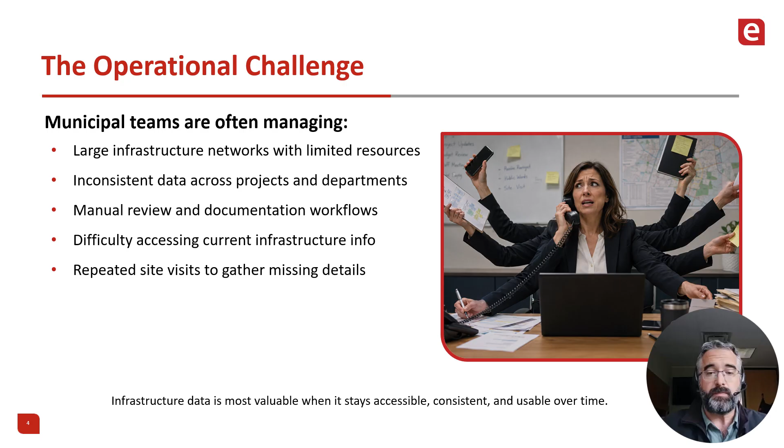And yet, despite all of that, municipalities today are under increasing pressure to maintain aging infrastructure while balancing those limited budgets, that limited staff, and growing service expectations in growing communities. At the same time, teams are being asked to make more informed and defensible infrastructure decisions using data that's often incomplete, outdated, or difficult to access consistently. Whether it's roads, sidewalks, bridges, or utilities, having reliable visibility into asset condition is becoming increasingly important for planning, prioritization, and long term asset management. A big part of that challenge is making sure infrastructure decisions are supported by accurate and accessible information.

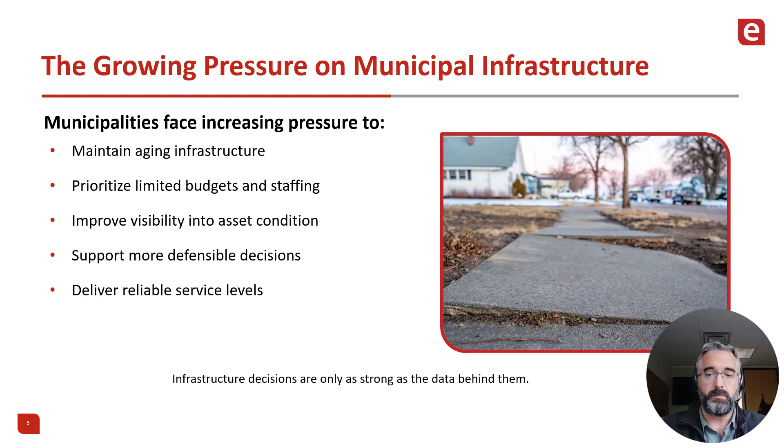Many municipalities are still relying on infrastructure information that has been collected over long periods of time across different projects, different departments, different consultants, and different systems. As a result, records can become incomplete, inconsistent, lost, difficult to maintain, or disconnected from current conditions in the field. In many cases, information is collected for a specific project, used once, and then becomes difficult to access or reuse later. That creates challenges for engineering review, asset management, planning, and long term infrastructure decision making. One of the biggest opportunities today is creating infrastructure records that are easier to update, share, and reuse across the organization that are harmonized with each other.

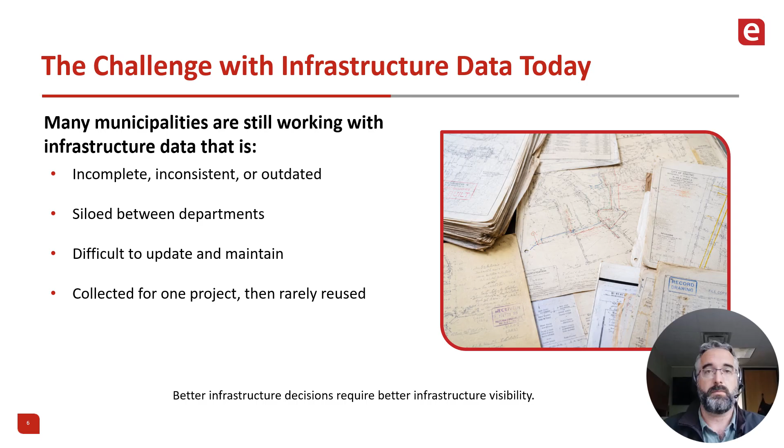And that naturally brings us to the traditional methods of doing this kind of data collection. So, traditional infrastructure data collection methods have supported municipalities for years, but many of those workflows can become difficult to scale as infrastructure networks grow and service expectations increase. A lot of condition assessments and documentation work still depends heavily on manual field review and human interpretation, which can make data collection time consuming and inconsistent between projects or teams.

Coverage can also be limited because collecting detailed information across large roadway or infrastructure networks often requires significant field time and repeated mobilizations. There are also safety considerations, whether crews are working near traffic, active roadways, or difficult environments. Coordination can become troublesome as crews are rotated or take time off, and regional nuance or unique areas and objects can add further confusion and time. Some reasons why municipalities are exploring newer collection technologies are to improve consistency, efficiency, coverage, and long term usability of the infrastructure data.

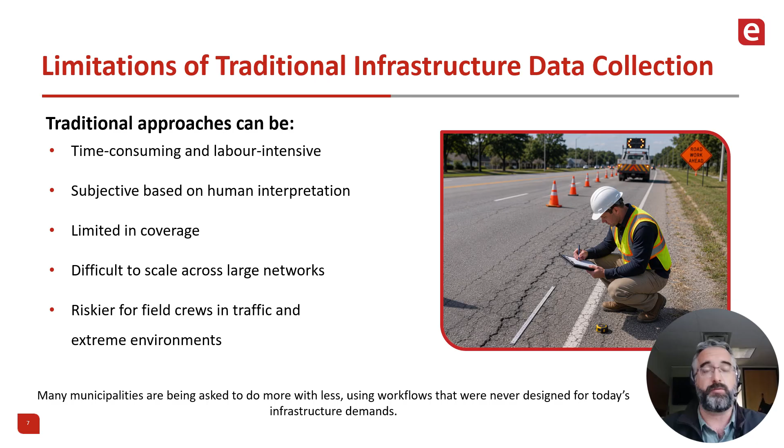So, as you might imagine, with the evolution of the technology and the history, municipalities are beginning to shift away from collecting infrastructure data only for individual projects and towards creating reusable digital infrastructure records. The focus is becoming less about isolated inspections and more about building complete, accessible data sets that can support planning, engineering, GIS, asset management, and future projects over time. There's also growing interest in workflows that improve safety, reduce repeat site visits, and provide better accessibility and visibility across large infrastructure networks.

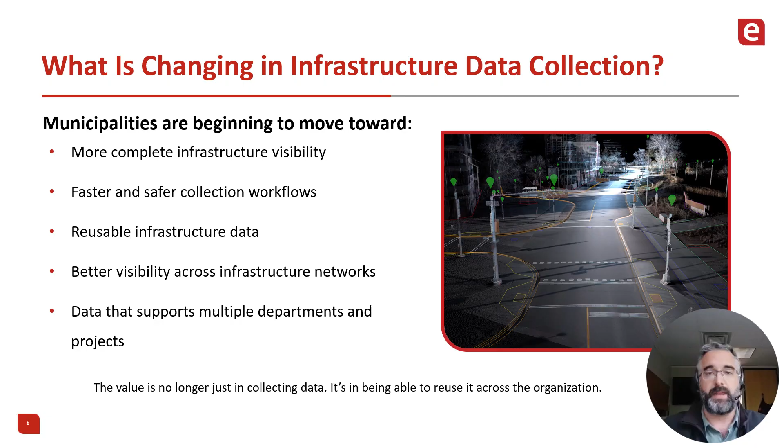A major change happening today is that infrastructure data is becoming something organizations expect to share and reuse across departments instead of recreating from scratch every time a new project starts. That shift is what's driving increased interest in technologies like LiDAR and reality capture. And so that brings me to my buzzword, reality capture. It really is an umbrella term for technologies that collect accurate digital information about real world infrastructure and environments.

There isn't just one way to do it. Different collection methods are used depending on the project, environment, and level of detail that are required. That can include vehicle-based mobile mapping for large roadway networks, drones for aerial collection, static or stay still LiDAR scanning for detailed infrastructure documentation, and portable systems for sidewalks, interiors, or hard to access areas. The common goal across all of these workflows is creating accurate, reusable digital infrastructure records that can support engineering, GIS, planning, asset management, and those future projects. The next step is understanding one of those core technologies behind many of these workflows, and that would be LiDAR.

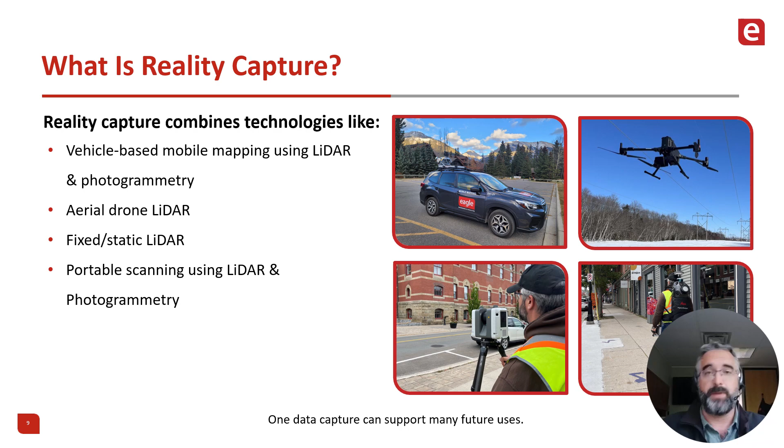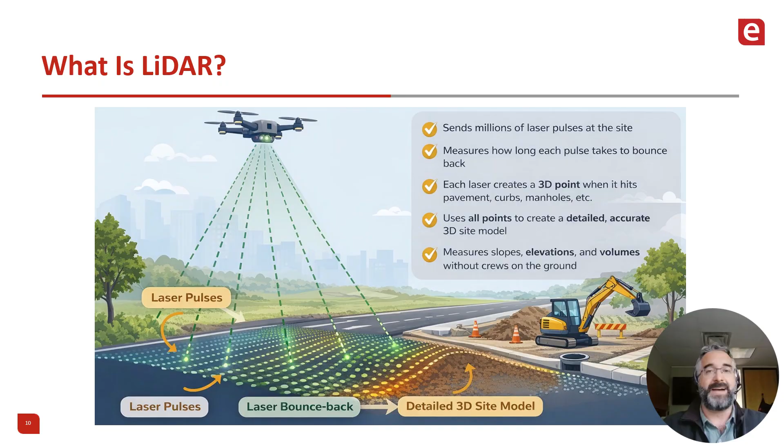At a high level, LiDAR works by sending out millions of laser pulses and measuring how long they take to bounce back after hitting surfaces like pavement, curbs, signs, bridges, and other infrastructure features. Each return creates a precise 3D point in space. When millions of those points are combined together, they create a detailed digital representation of the roadway and the surrounding environments. For municipalities, the value is not just the visualization, it's the ability to create accurate, repeatable infrastructure records that can support engineering review, condition assessments, GIS integration, asset management, and long term planning from a single collection workflow.

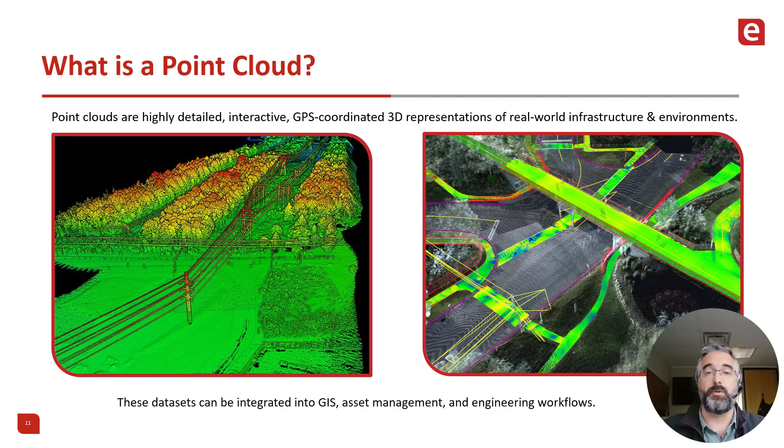These data sets, though, can also be used to create interactive 3D models that allow teams to visualize, review, and analyze infrastructure conditions remotely and more precisely. Because the data is measurable and GPS coordinated, teams can use it to extract distances, elevations, slopes, clearances, offsets, asset locations, and other engineering information directly from the data set. One of the major advantages for municipalities is that information can often be reviewed later without needing repeated site visits, helping reduce field mobilization while improving consistency and long-term usability of those infrastructure records.

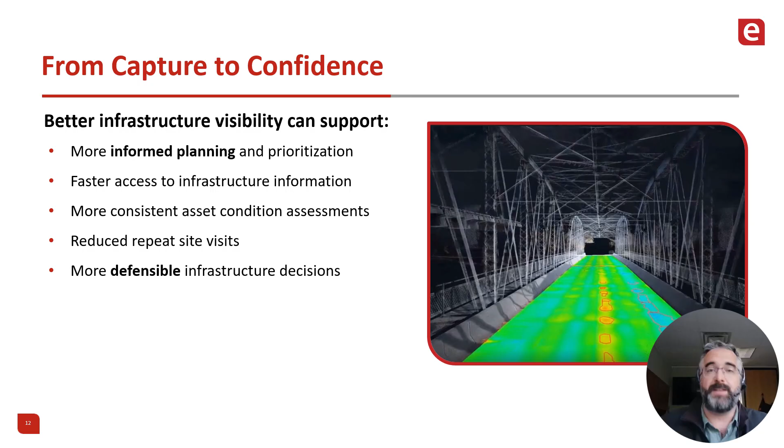What makes these workflows valuable is not just the way the data is collected, but what municipalities can do with the information afterwards. Better infrastructure visibility can support more informed planning, more consistent condition assessments, and faster access to infrastructure information across departments and projects. It can also reduce the need for repeat site visits and create more complete records that remain useful long after the original project is complete. Ultimately, better infrastructure data helps support more confident and defensible infrastructure decisions. To best illustrate this, we figured that we'd walk you through some of the practical municipal use cases and examples of how these technologies are being used to support infrastructure planning, documentation, and asset management.

One of the biggest advantages is the ability to create objective and repeatable infrastructure records that can support engineering review, condition assessments, GIS integration, and long-term asset management. These workflows can also improve safety and efficiency by reducing repeated site visits and minimizing the amount of time crews need to spend working in active roadways or in difficult field environments.

Another major shift is that the same data sets can often support multiple teams and future projects instead of being collected once and archived away after a single use. Ultimately, the value is not just in collecting the data, it's in creating reusable infrastructure records that can support better long-term planning and decision making across the organization.

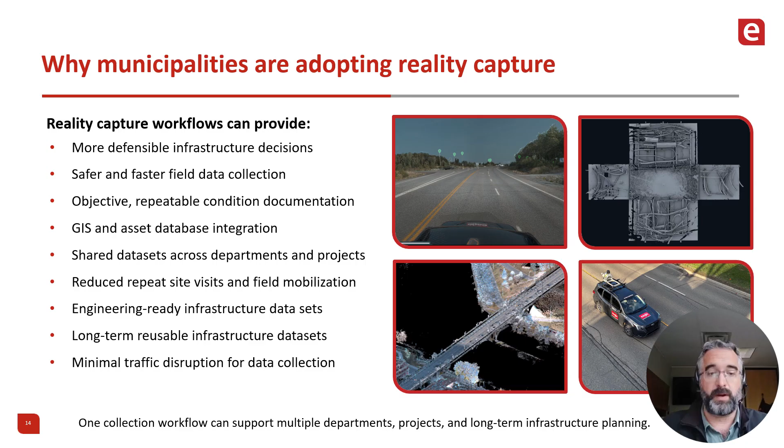A prime example of how a single collection workflow can support multiple municipal needs at the same time is corridor infrastructure capture. Instead of collecting data separately for roads, sidewalks, signage, utilities, and asset inventories, a corridor capture can create a shared infrastructure data set that supports many different departments and future projects. These data sets can be used for roadway and pavement review, corridor measurements, asset locations, utility documentation, signage reporting, engineering review, and long-term capital planning.

One of the biggest advantages is that municipalities are creating infrastructure records that remain useful long after the original collection is complete, being able to compare that historical information against newly acquired information more directly. And rather than collecting data for a single purpose, the information can continue supporting planning, maintenance, GIS integration, and future engineering workflows over time.

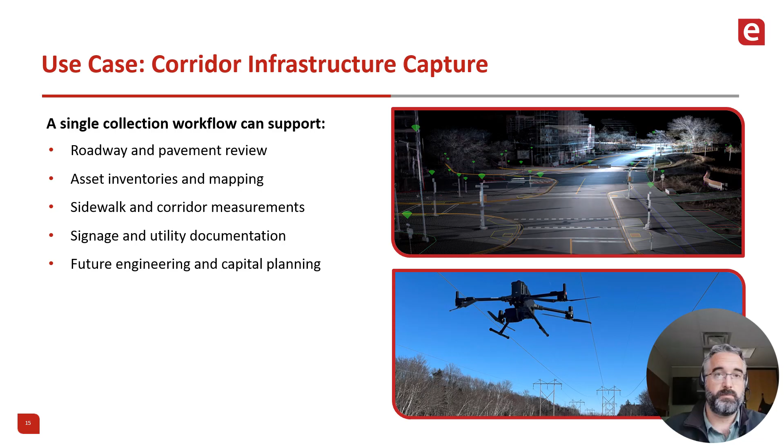Road and pavement condition assessments are one of the areas where reality capture workflows are seeing growing adoption within municipalities. Using mobile LiDAR and imaging systems, municipalities can collect detailed roadway information at corridor scale while creating datasets that support PCI-based pavement review, crack identification, surface condition analysis, and other engineering evaluations. Because the collection is repeatable and GPS coordinated, teams can also compare conditions over time and create more consistent infrastructure records across different projects.

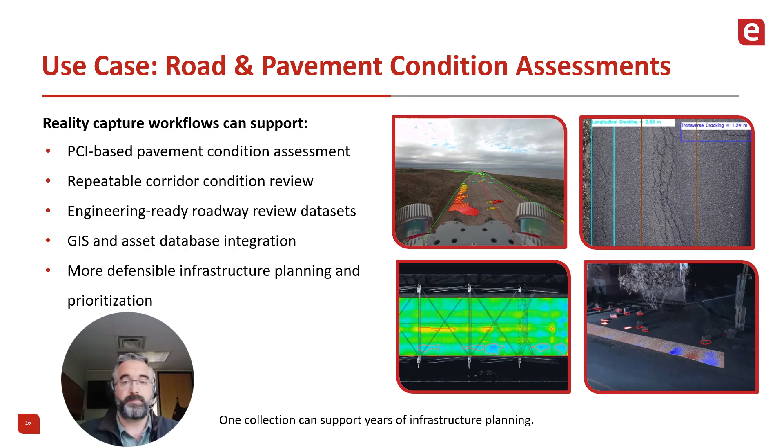Bridges and structure documentation is another area where reality capture workflows can provide significant value for municipalities and engineering teams. LiDAR and scanning technologies can be used to capture highly detailed bridge geometry, deck conditions, structural clearance, and surrounding infrastructure environments. These datasets support engineering review, 3D modeling, digital twin development, and long-term infrastructure documentation while creating measurable and repeatable records for existing conditions.

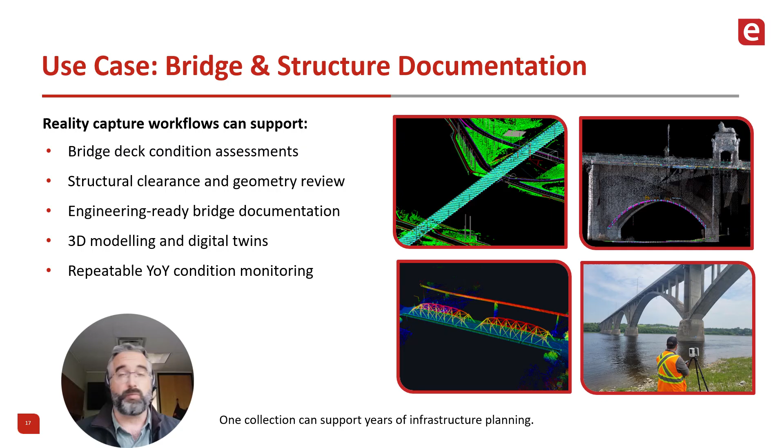Because the data is GPS coordinated and reusable, municipalities can also perform year over year condition monitoring and compare infrastructure changes over time without relying solely on traditional manual documentation workflows. The result is a more complete and defensible infrastructure record that can support inspections, planning, rehabilitation projects, and long-term asset management.

Asset and right-of-way mapping is another strong application for reality capture workflows because a single corridor collection, again, can support multiple inventories, measurements, and planning needs all at the same time. Using LiDAR and imaging systems, municipalities can extract roadway assets such as poles, signage, utilities, barriers, sidewalks, and other linear infrastructure directly from the data sets.

These workflows also support right-of-way documentation, corridor measurement, offset analysis, and georeferenced infrastructure mapping without relying entirely on manual field collection. Because the information is GPS coordinated and measurable, I've already mentioned this before, but it's easier to integrate this information into GIS and asset management systems while supporting those future engineering projects. One of the biggest advantages is that municipalities are creating reusable corridor records that can continue supporting the infrastructure after the initial collection.

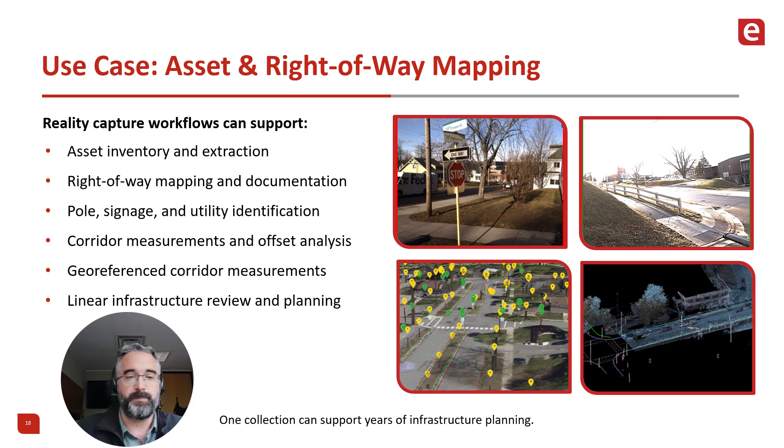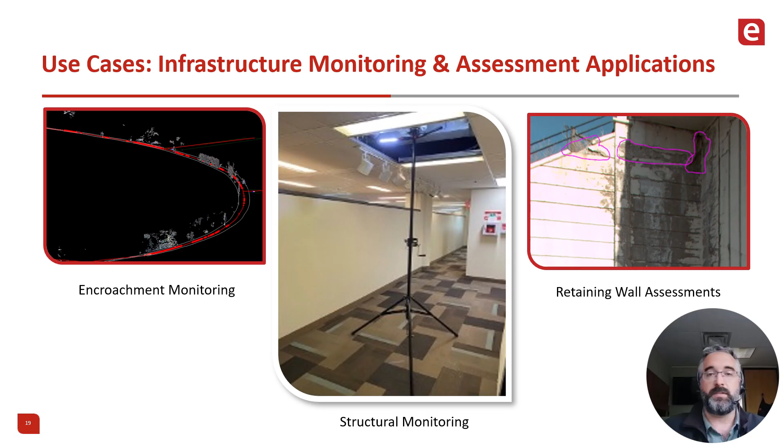But we can also support structural monitoring and interior documentation workflows where precise measurement and repeatable conditions are essential for facility management or infrastructure review. And on the right, the retaining wall example shows how detailed data sets can support condition assessments, geometry review, and targeted engineering analysis without relying entirely on manual field measurements. One of the key advantages is that these workflows can create measurable and repeatable infrastructure records that teams can revisit later in full context for additional analysis, comparison, and future project needs.

And further examples on the left, you'll see a guardrail survey example where LiDAR and imaging data can support infrastructure inventories, offset measurements, condition review, and corridor safety assessments. This is done through either automatic or semi-automatic means, meaning that we actually have means to get the computer to do most of these measurements for us, which greatly increases our productivity.

In the center example, the overpass had actually been struck twice in the same week by oversized vehicles. And a few months earlier, the structure had already been scanned as part of one of our corridor documentation workflows. And because of that, there was a data set that already existed, and the team was able to quickly revisit the digital record after the incident to review measurements, clearances, existing conditions, all without starting from scratch.

That's a good example of the long-term value of reusable infrastructure data sets. The information collected for one purpose can then be later used to support other investigations, other engineering reviews, and future planning needs when unexpected events occur.

So on the right is a vegetation clash detection example, where municipalities and utilities can identify vegetation encroachment over overhead infrastructure and transportation corridors using measurable spatial data. Same thing as the sidewalks, but instead of using the sidewalks as a reference, we use the cables or the suspended infrastructure as the reference for the computer. This shape, tell me everything that's within X distance of this shape.

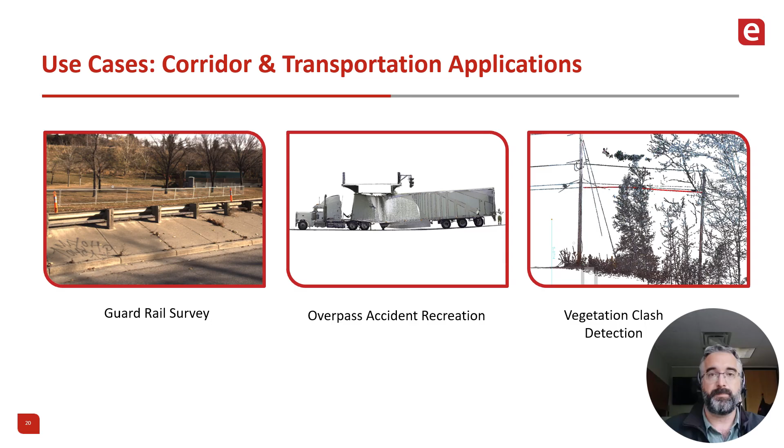These types of workflows help municipalities move from reactive field review towards a more proactive infrastructure monitoring, planning, and risk management. Tree inventory and mapping is another really good example of a very efficient application of mobile mapping and reality capture. We use it to identify vegetation locations, heights, clearances, and potential conflicts near infrastructure corridors.

In the center of this particular slide is a manhole or underground structure that was scanned where detailed 3D data sets can support confined space documentation. So basically, one of these holes can be drained, and then instead of sending a person in who may end up not collecting all the information, we send a scanner down there instead to not only keep persons out of unsafe working environments, confined space entry, but to fully document that internal space to the satisfaction of a survey, review, or engineering design. This allows for the infrastructure to be reviewed and the long-term asset record to be established without relying on manual sketches or photographs.

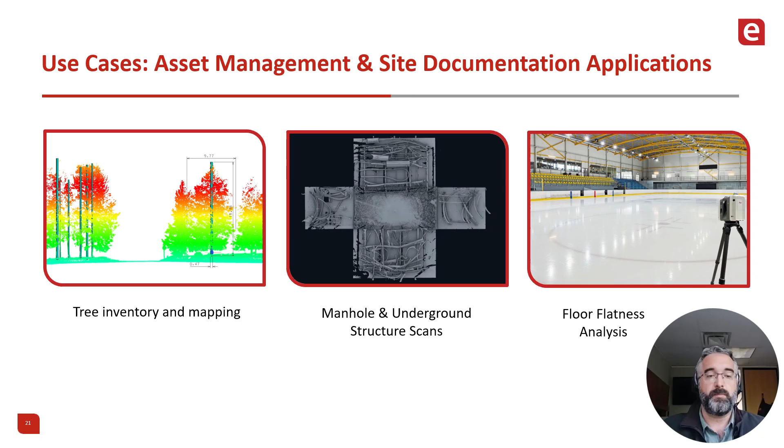And then finally, on the right is a floor flatness analysis where, I live in Canada, hockey's pretty important here. High accuracy scanning can support construction verification, facility documentation, and quality control workflows for large indoor environments. So that one in particular, we were doing a floor flatness survey in order to aid in the construction of a refurbished rink. But I could go on and on and on.

On the left of your screen now is a volumetric assessment. So this is where LiDAR data sets are used to calculate stockpile volumes, earthwork quantities, including cuts and fills, and material movement using measurable 3D data instead of manual estimation tools. In the center is an existing condition documentation example. So before construction begins, detailed scans can capture the exact condition of a site, roadway, or structure. So teams have defensible records on pre-construction conditions for engineering review, coordination, and future reference.

And then finally, on the right is a construction progress monitoring example where repeat scans can document how a project changes over time, where it might differ from the original designs, and help teams compare progress against the schedule and the previous site conditions. These types of workflows can help create more accurate and repeatable project records while improving visibility throughout planning, construction, and long-term infrastructure management.

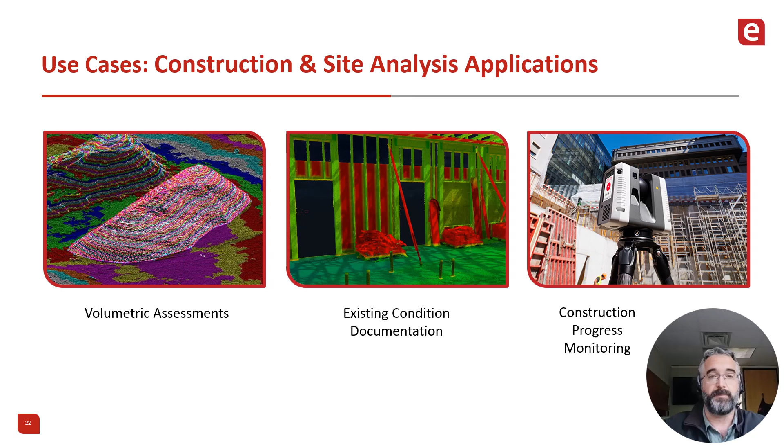And while you may feel like I've thrown a lot of information at you today, I feel like I have given you nothing. This is a very robust industry with varying degrees of accuracy that can meet your needs today. And unfortunately, I just have too many things to talk about in order to cover it all. So the goal of this session was really to provide a practical introduction to how municipalities are beginning to use LiDAR and reality capture workflows to support infrastructure planning. And what we covered today is only a small example of the types of workflows that are possible. Every municipality has different infrastructure challenges, different data sets, and different operational priorities.